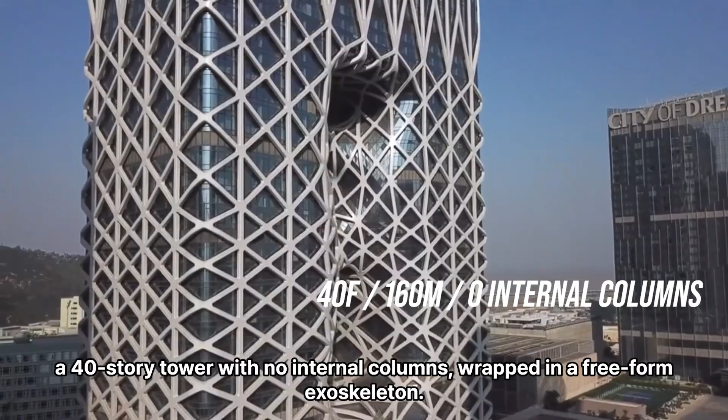We were Team 5. This is our breakdown of one of Macau's most daring buildings. For our project, we chose Morpheus Hotel, a 40-story tower with no internal columns wrapped in a freeform exoskeleton. Our story begins not with the building, but with the land beneath it. Originally, this entire area was open sea.

Through decades of land reclamation, what was once ocean is now one of Asia's most iconic skylines. But how did this strip of land come to exist in the first place?

In the 1990s, land was reclaimed to connect the islands of Taipa and Coloane. The name Cotai was inspired by these two islands. Cotai was reclaimed for additional casinos and hotels.

But on this reclaimed land rose something bold, a resort called City of Dreams. City of Dreams opened in 2009, built by Melco Resorts. It's a resort with casino, theaters, restaurants, and 4 hotels, including Morpheus. Its brand promise is Dream Beyond. Luxury, arts, and imagination in one place. But this dream needed a centerpiece.

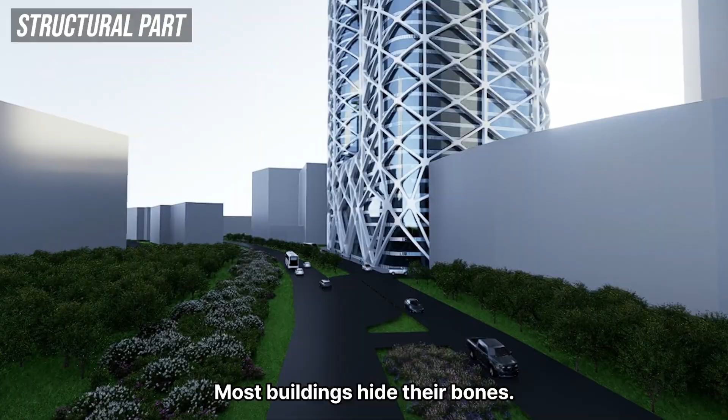We chose Morpheus because it's not just a beautiful building. It's where design asks the impossible and engineering answers. Reclaimed ground, double curved glass, no internal columns. This video unpacks how it was solved. Most buildings hide their bones. This one turned them inside out. The world's first freeform high-rise exoskeleton, in Macau.

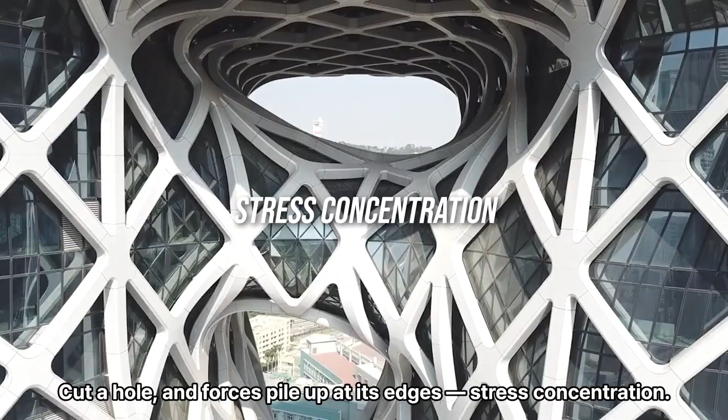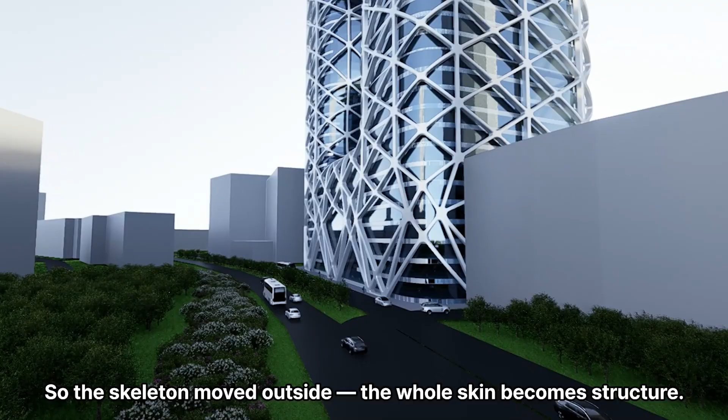But cutting holes through a tower creates serious problems. Cut a hole and forces pile up at its edges: stress concentration. And this is Macau, typhoons and earthquakes included. So, the skeleton moved outside. The whole skin becomes structure. Dense where loads are heavy, lighter as it climbs. A web of 2,500 connections.

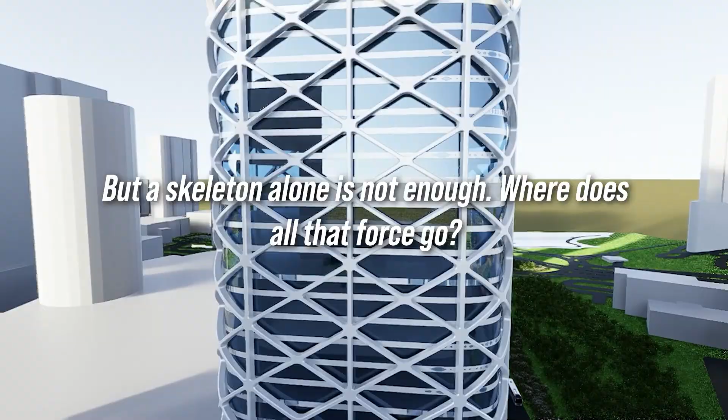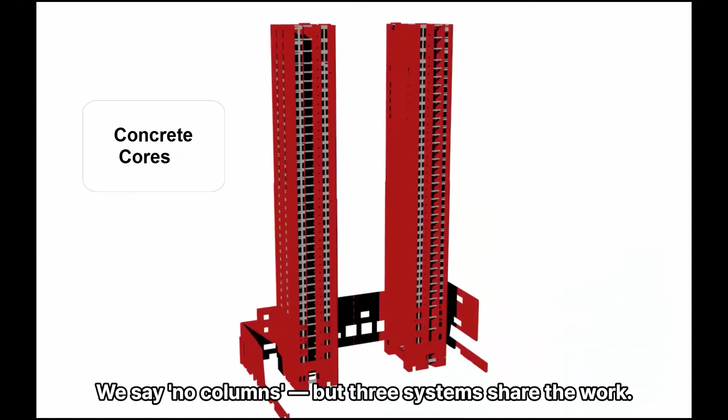But a skeleton alone is not enough. Where does all that force go? We say no columns, but 3 systems share the work. 2 concrete cores form the spine, columns beside them assist, and the exoskeleton carries the skin.

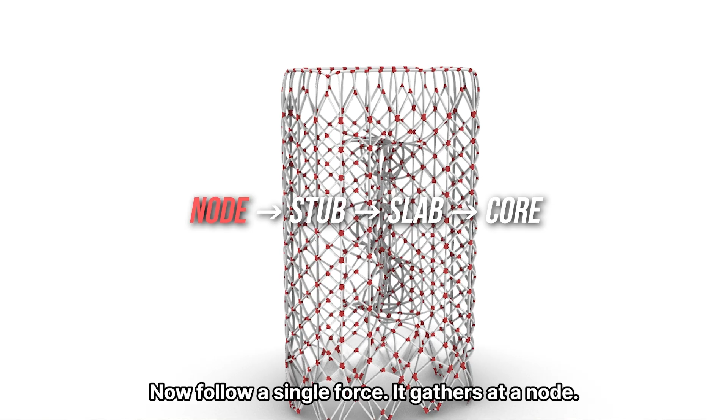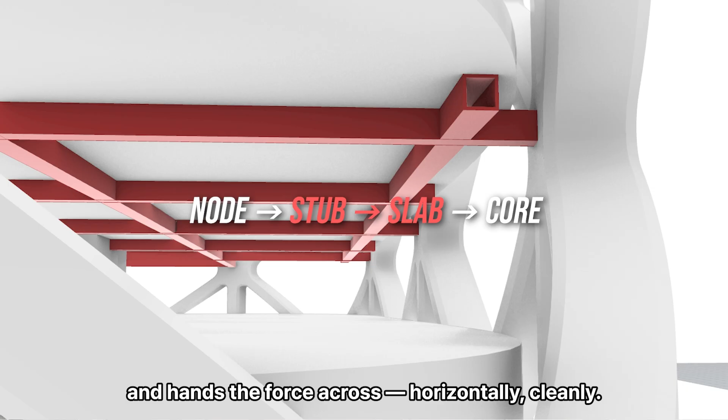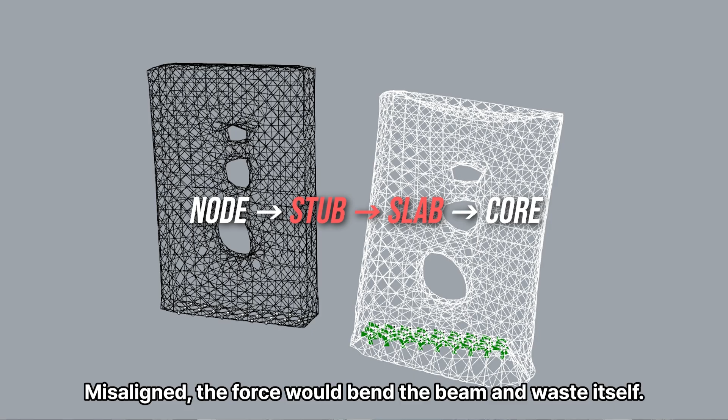Now, follow a single force; it gathers at a node. A short stub beam reaches 600 mm through the skin, and hands the force across horizontally, cleanly. The quiet genius: every node sits exactly at slab level. Misaligned, the force would bend the beam and waste itself. Aligned, it travels straight into the slab, the core, and to the ground.

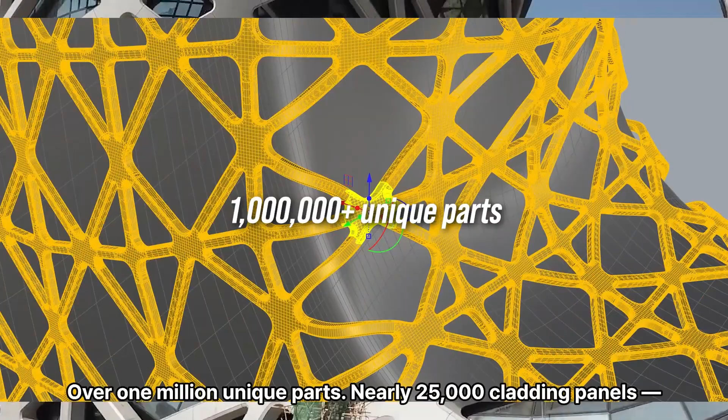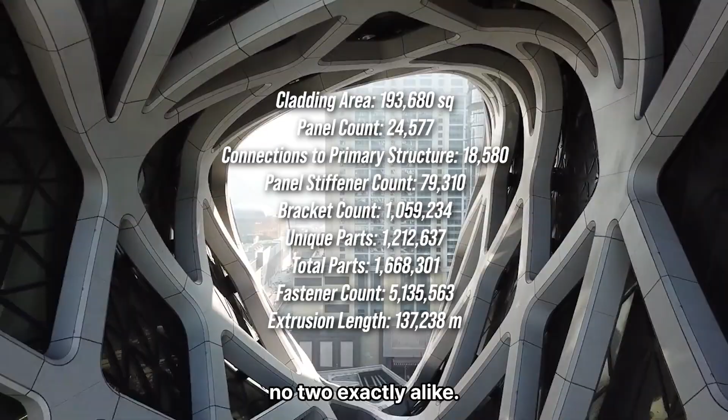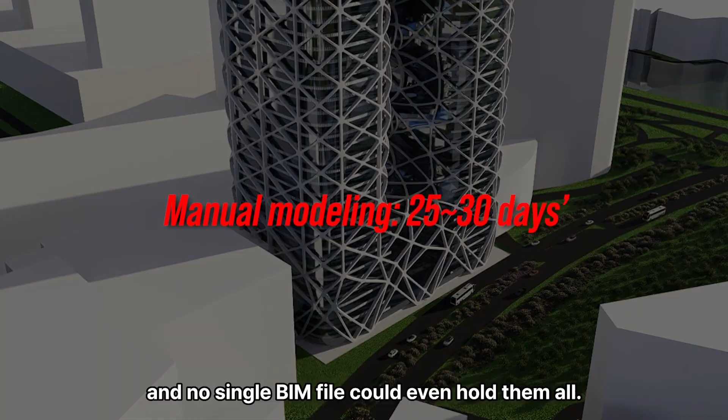But here was the real challenge. Every part was different. Over 1 million unique parts, nearly 25,000 cladding panels. No two exactly alike. Drawing them by hand would take weeks of modeling. And no single BIM file could even hold them all. So instead of drawing, they wrote rules.

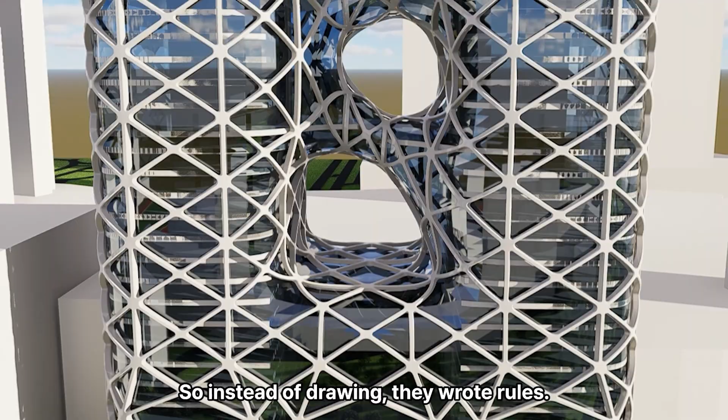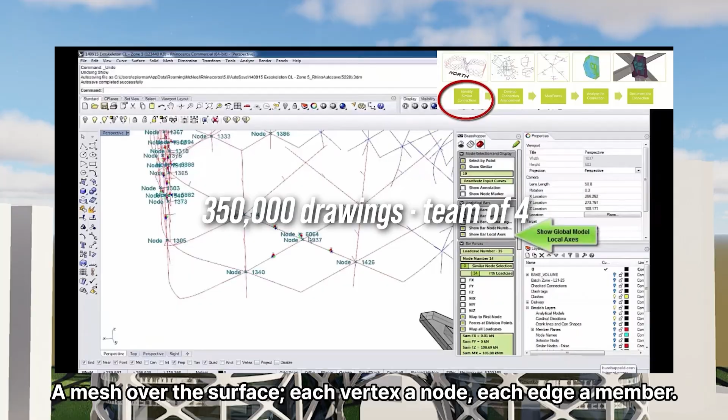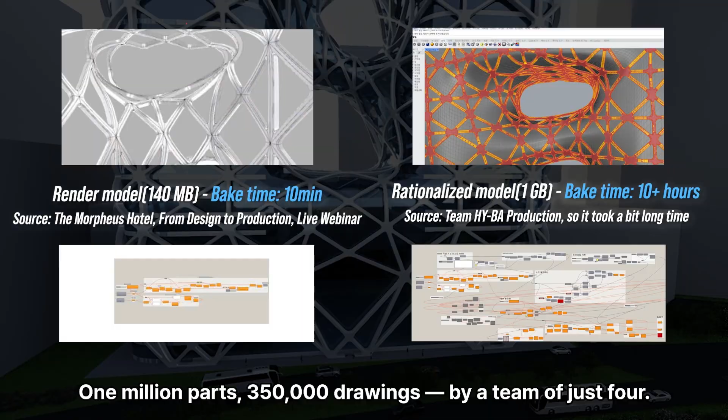In Rhino and Grasshopper, with the Elefront plugin, the entire facade was generated as data, baked every night in 10+ hours. A mesh over the surface, each vertex a node, each edge a member. Panels sorted, brackets and fasteners placed automatically. 1 million parts, 350,000 drawings by a team of just 4.

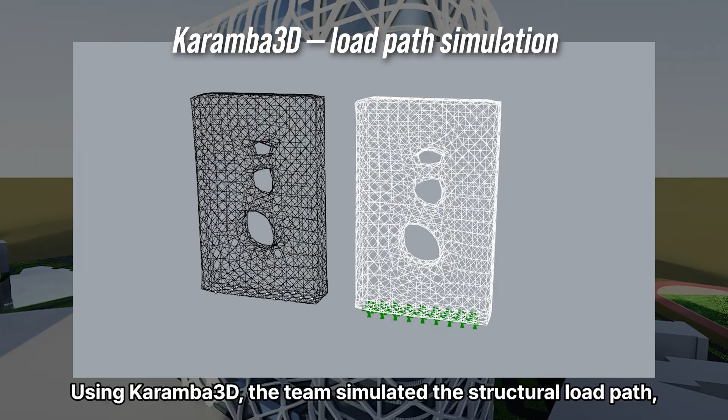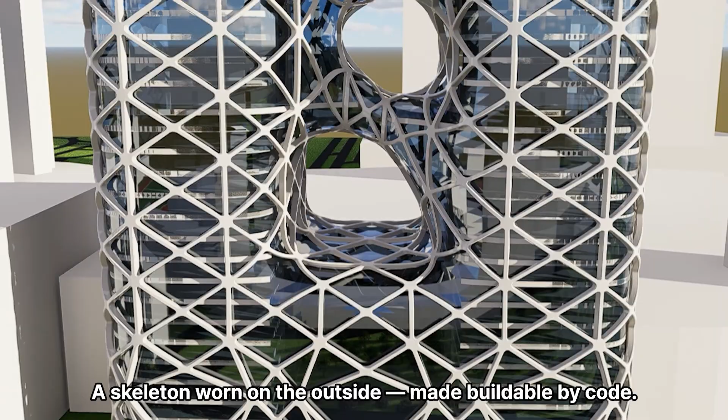But would it actually stand? We tested it in the same model. Using Karamba 3D, the team simulated the structural load path and confirmed the stress at the center stayed within safe limits. A skeleton worn on the outside, made buildable by code. Structure became its face and computation made it real.

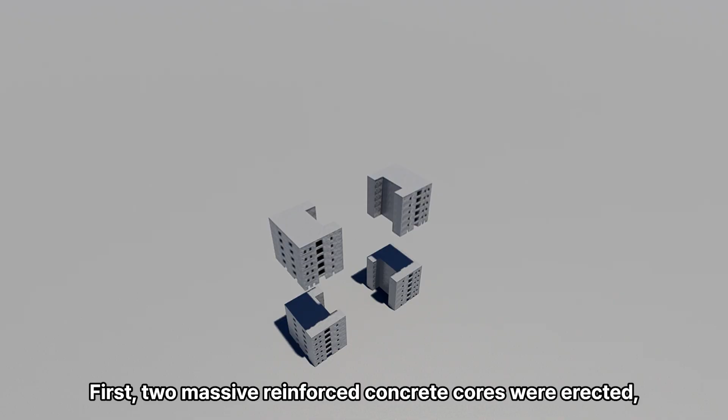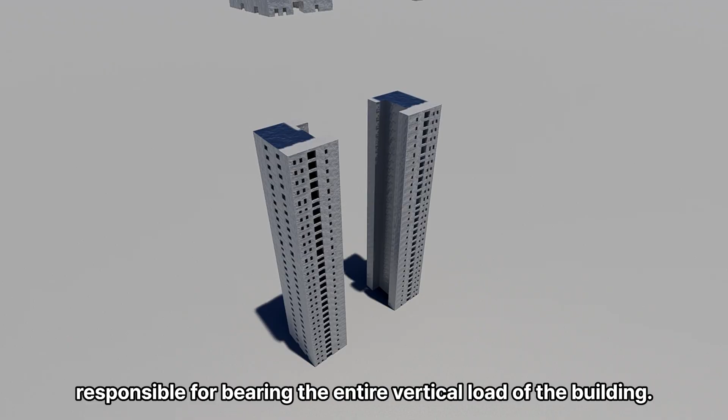Next, I will explain the construction stage. First, 2 massive reinforced concrete cores were erected, each standing 160 meters tall, responsible for bearing the entire vertical load of the building. These twin cores served as the structural backbone of Morpheus.

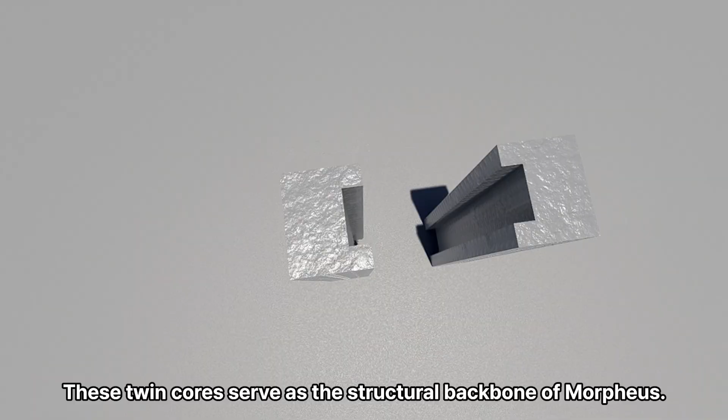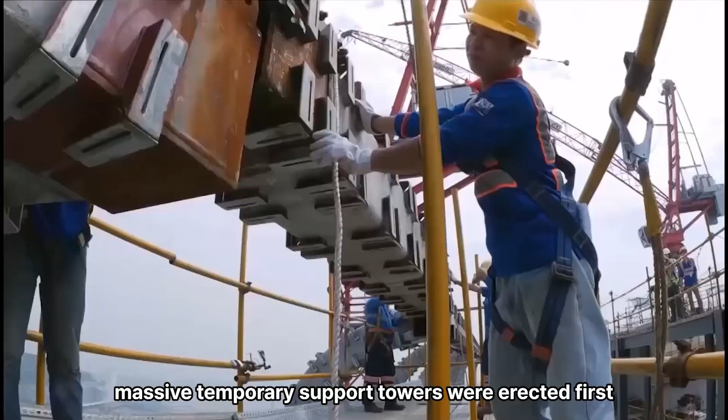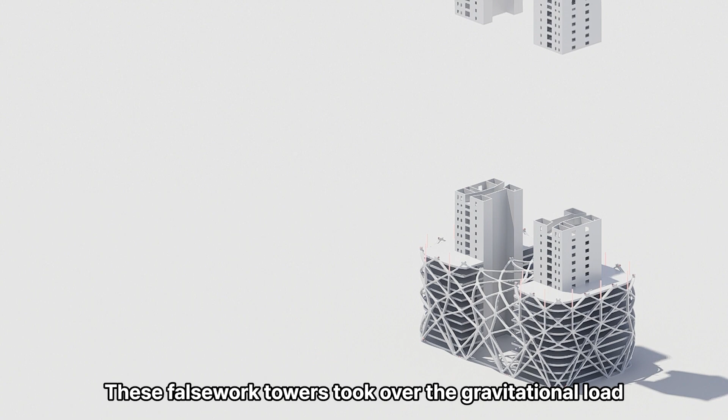As construction continued, the freeform exoskeleton had to be installed. However, it could not support itself until the full structure was complete. To keep the structure stable while steel nodes were welded on site, massive temporary support towers were erected first, to carry the 4,500 tons of steel until the exoskeleton could stand on its own. These falsework towers took over the gravitational load until the exoskeleton reached structural self-sufficiency.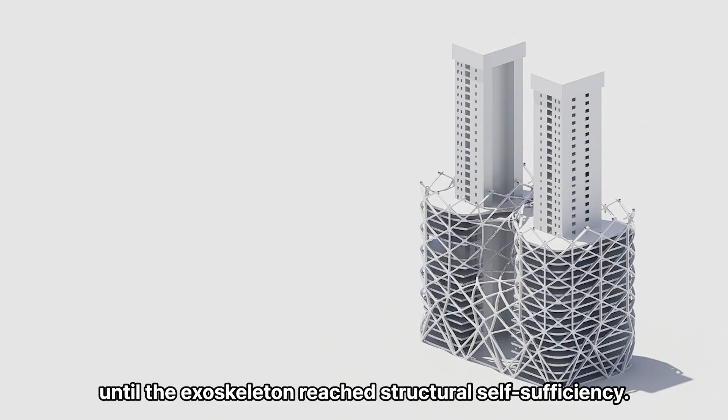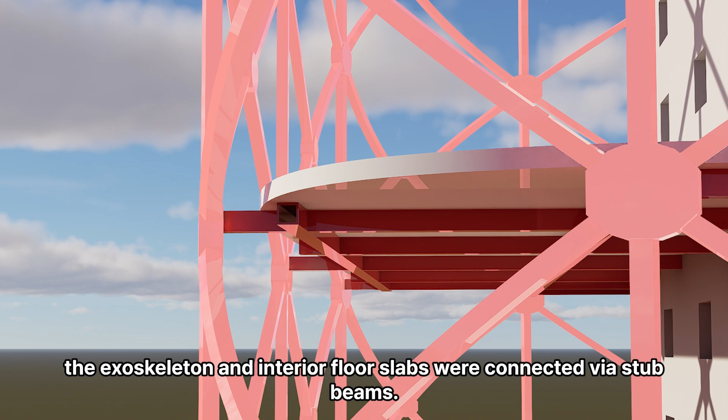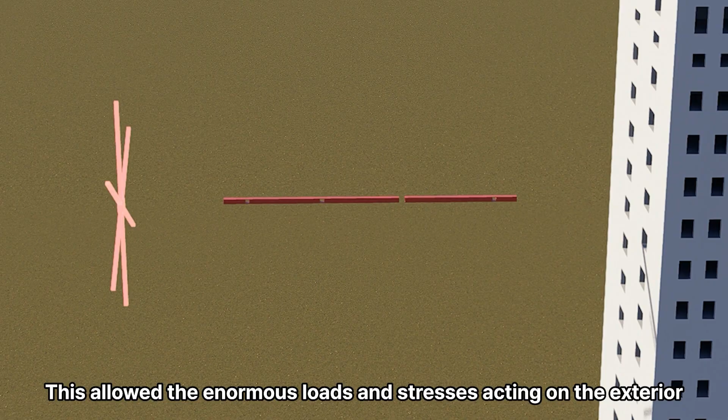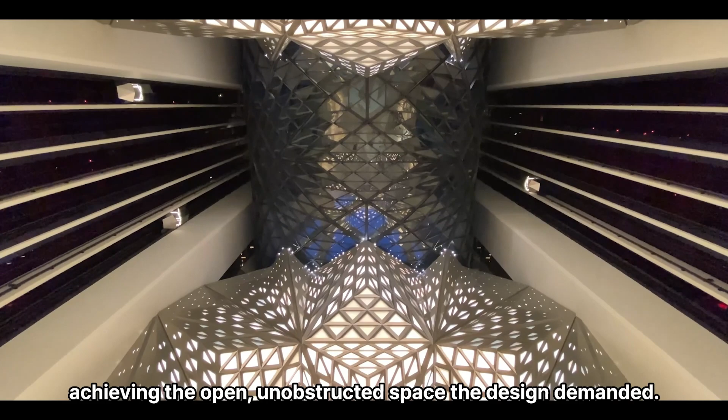The welded nodes were then sequentially integrated into the exoskeleton. Once the core reached a certain height, the exoskeleton and interior floor slabs were connected via stub beams. This allowed the enormous loads and stresses acting on the exterior to be transferred directly and efficiently into the cores without any bending. The result was a completely column-free interior, achieving the open, unobstructed space the design demanded.

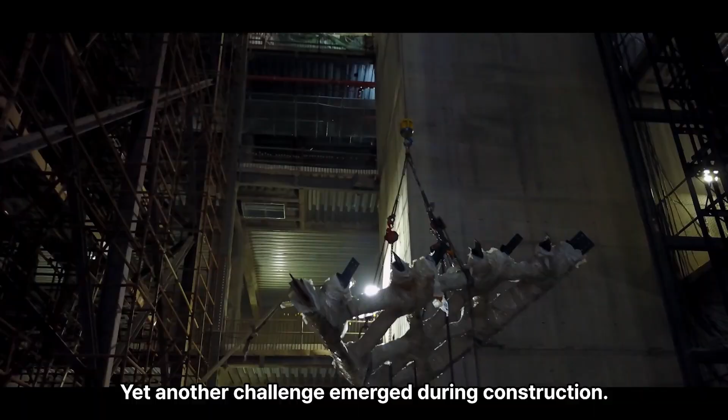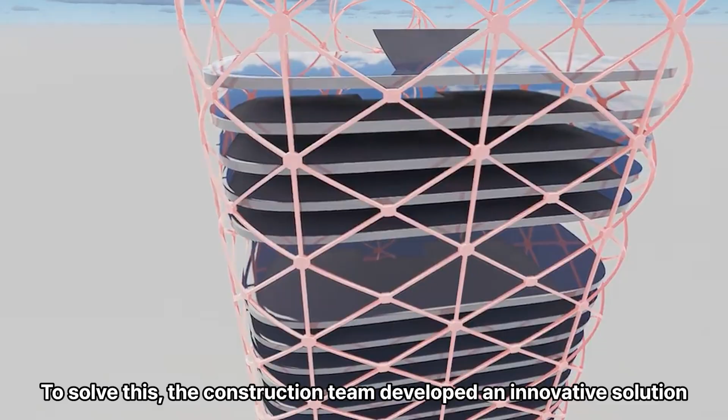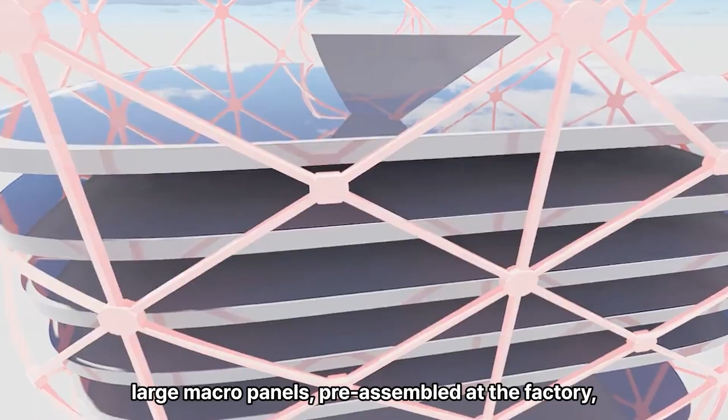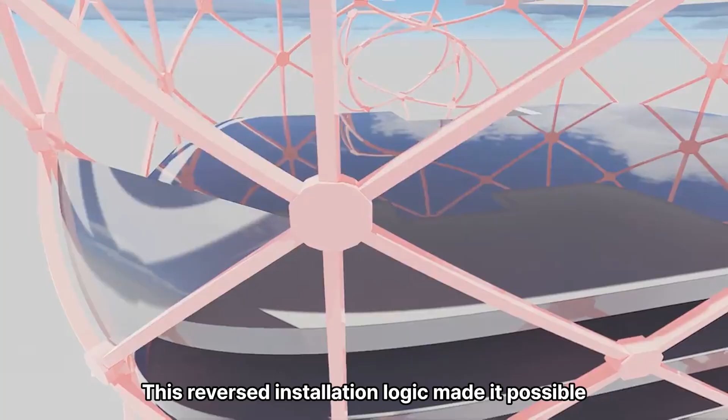Yet another challenge emerged during construction. Because of the exoskeleton wrapping the building, it was impossible to install the facade panels using cranes and gondolas from the outside as in a typical skyscraper. To solve this, the construction team developed an innovative solution. Large macro panels pre-assembled at the factory were pushed outward from inside the building and installed from the interior, not the exterior. This reversed installation logic made it possible to clad the entire facade safely and precisely.

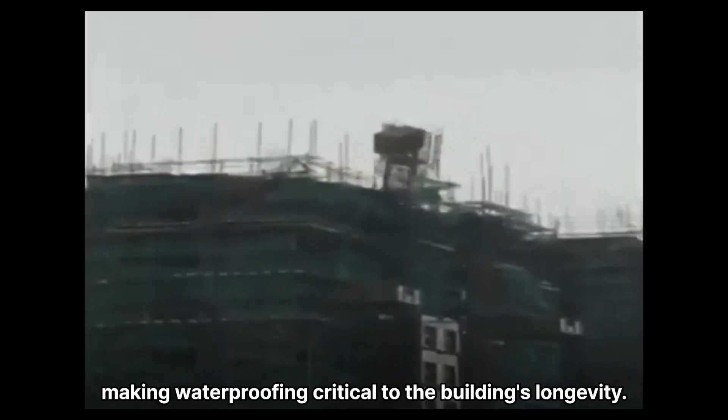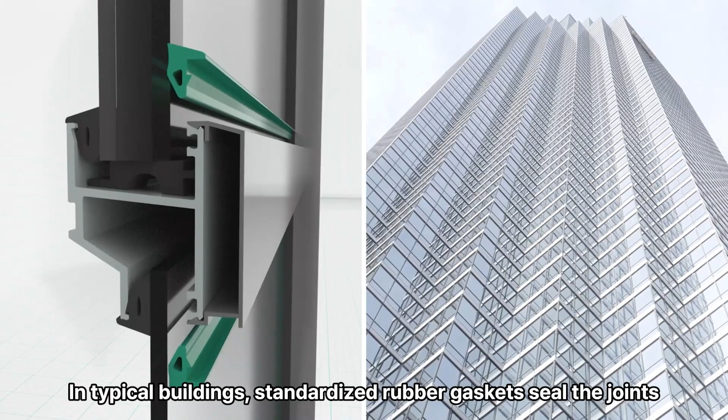Hong Kong and Macau are frequently hit by heavy rain and typhoons, making waterproofing critical to the building's longevity. In typical buildings, standardized rubber gaskets seal the joints and prevent water from seeping in. But Morpheus has 2,500 steel nodes, each one a unique shape. Standard gaskets simply cannot fit them all, leaving gaps that leak.

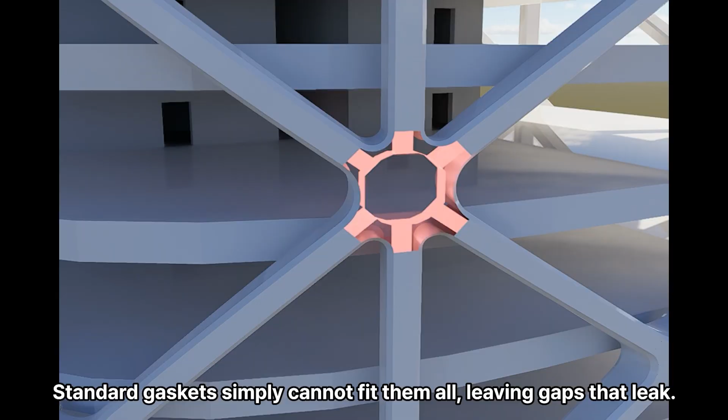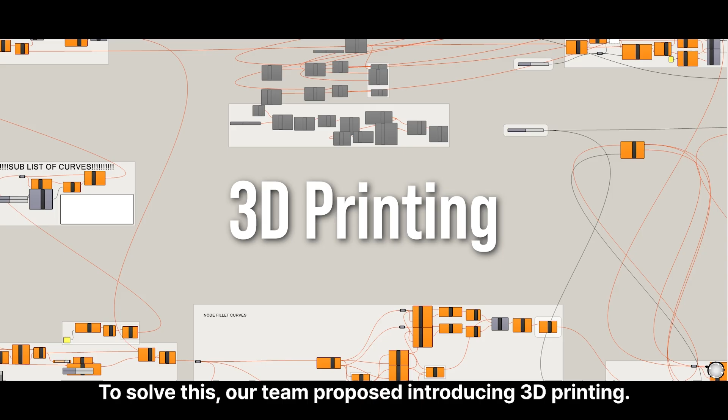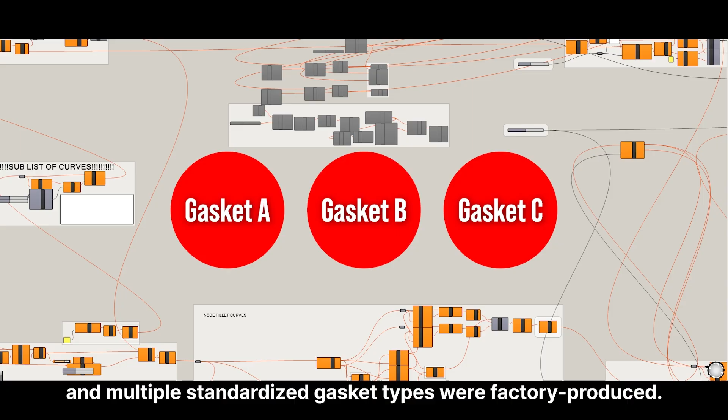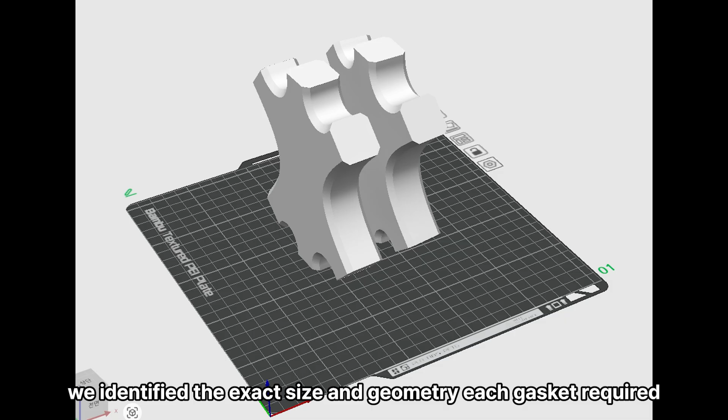To solve this, our team proposed introducing 3D printing. In the actual construction, nodes were grouped into categories, and multiple standardized gasket types were factory produced. We took this one step further. Using the 3D file data for every individual node, we identified the exact size and geometry each gasket required and proposed fabricating them on demand with 3D printing. Through this entire construction process, Morpheus has been reborn as one of Macau's most iconic landmarks.

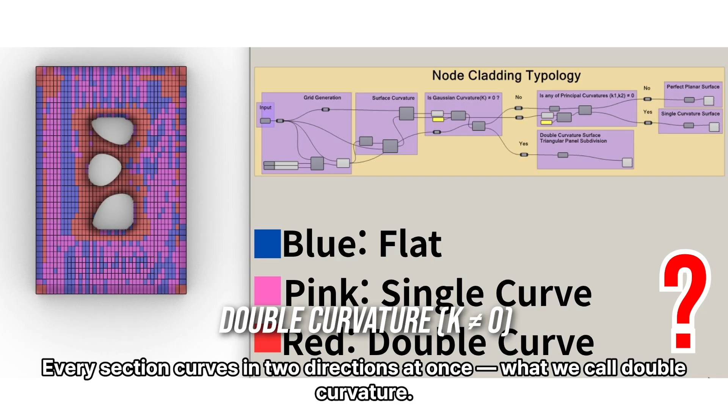Now let's turn to the glass that wraps the entire building. Each glass facade: look closely and you'll notice no two panels are alike. Every section curves in two directions at once, what we call double curvature. Can this even be built from flat glass?

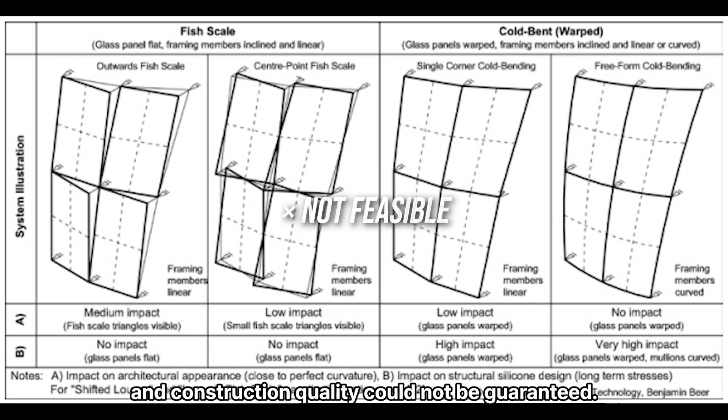Initially, cold bending was considered. It's cost-effective and efficient, but the contractor lacked the experience, and construction quality could not be guaranteed. The answer came from geometry itself. Three points always define a single plane. So any curved surface, no matter how complex, can be built from flat triangles.

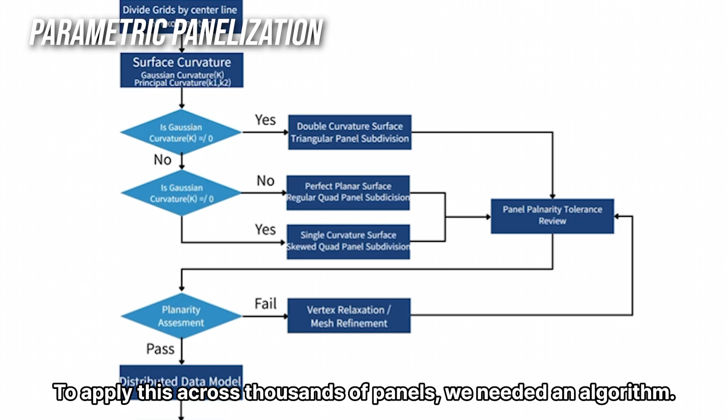And that same principle is right there on the building itself. Each glass panel of Morpheus is a flat triangle. To apply this across thousands of panels, we needed an algorithm. It reads each panel's curvature and assigns the right triangular panel type. Finally, we built this algorithm ourselves in Grasshopper software.

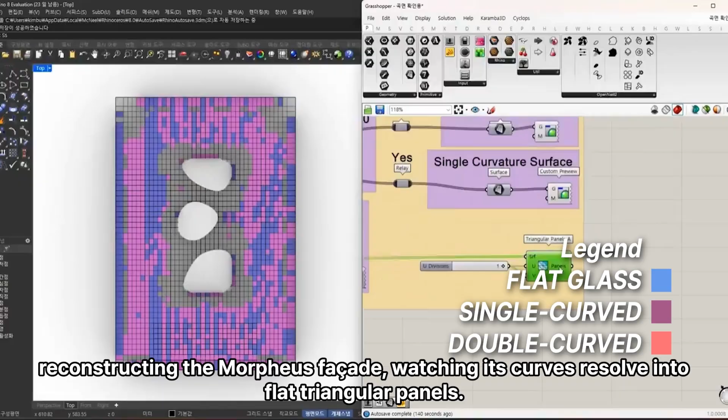It sorts every glass panel by curvature. Reconstructing the Morpheus facade, watching its curves resolve into flat triangular panels. Standing in the heart of Macau's Cotai Strip, this is not just a hotel. The Morpheus is the world's first free-form high-rise exoskeleton.

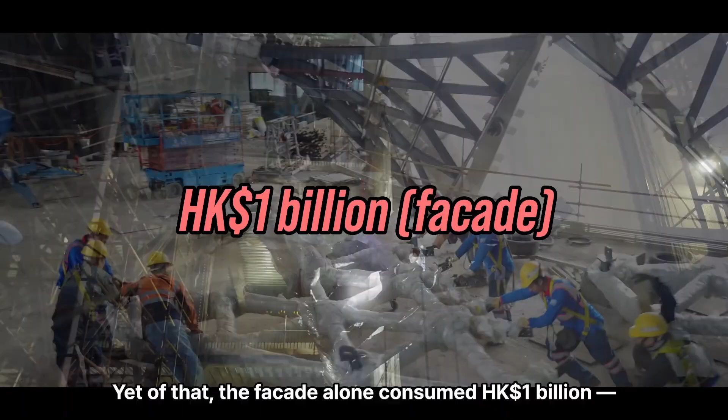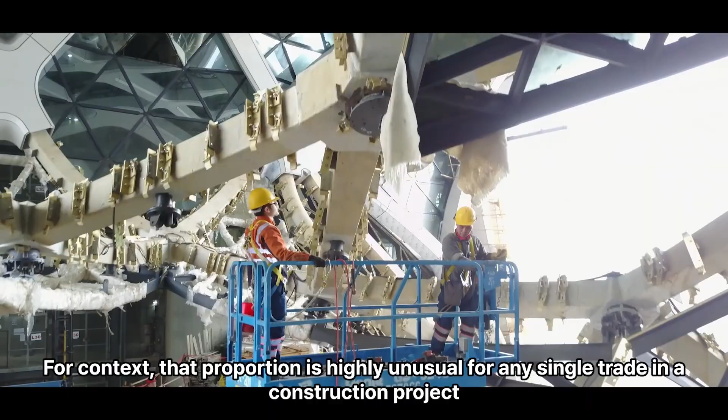Total construction cost was US $1.1 billion. Out of that, the facade alone consumed a significant share. A single package accounting for 12% of the entire project budget. For context, that proportion is highly unusual for any single trade in a construction project. From now on, we examine why this happened and what our team proposes to do about it.

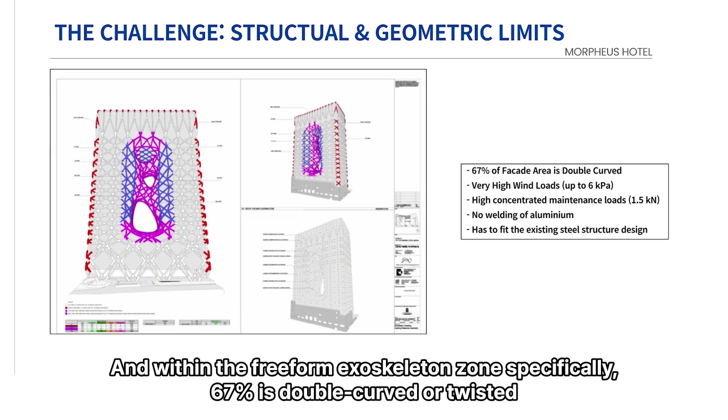The root cause of this cost explosion is curvature. The Morpheus Hotel exoskeleton aluminum cladding covers approximately 57,000 square meters. Of this, 21% of the total is double curved surface. And within the freeform exoskeleton zone specifically, 67% is double curved or twisted.

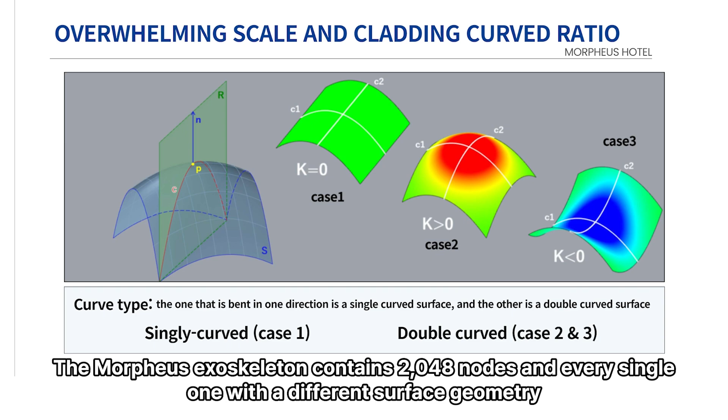There are three fundamental surface types in facade engineering: flat surfaces, single curved surfaces that bend in one direction, and double curved surfaces that curve simultaneously in two directions. Double curved panels can cost 5 times more than flat panels. The Morpheus exoskeleton contains 2,048 nodes, every single one with a different surface geometry. This is the fundamental reason facade work consumes 12% of the total project budget. So is this high cost economically justified?

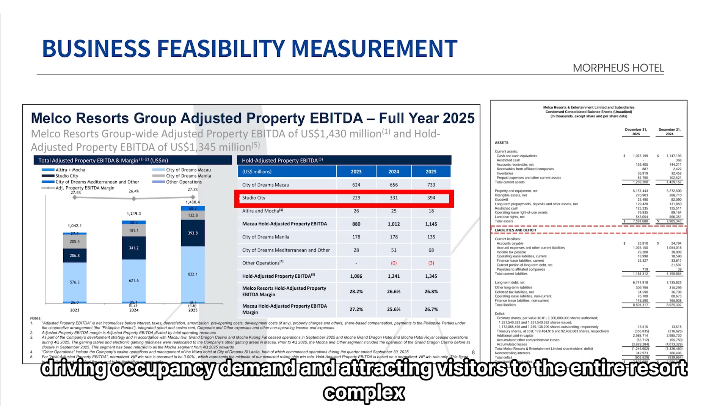To answer this, our team analyzed actual financial data from Melco results. City of Dreams Macau's EBITDA is as follows. The implication is clear. Morpheus, as an iconic architectural landmark, is generating a brand premium, driving occupancy demand and attracting visitors to the entire resort complex. Iconic design creates long-term commercial value, and that value is accelerating the recovery of the initial investment.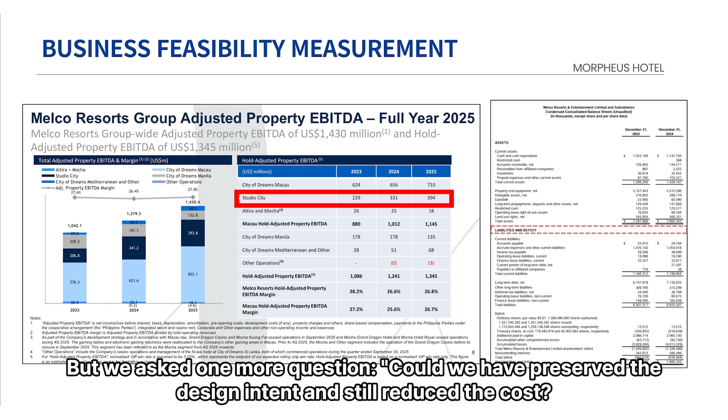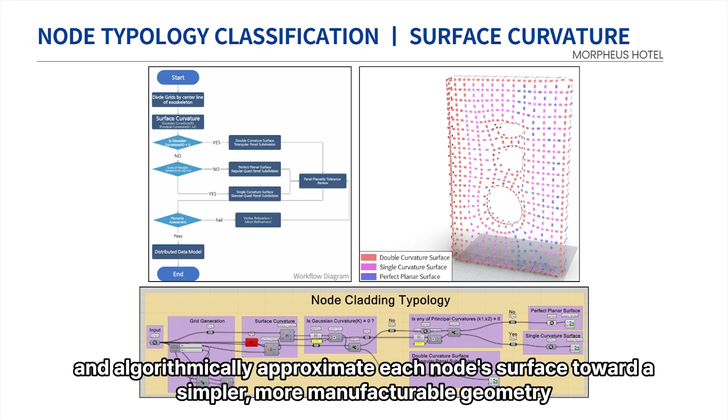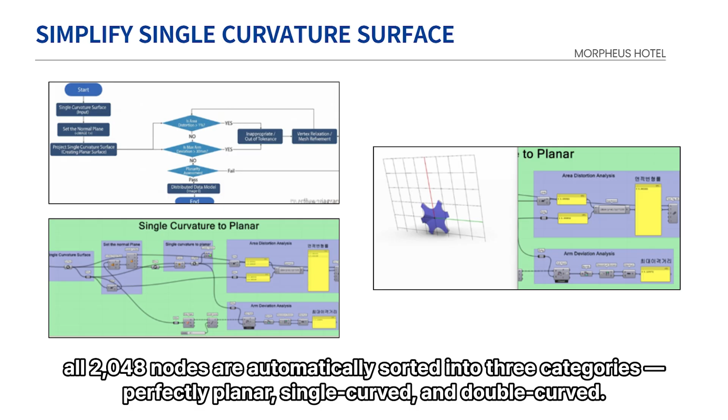But we asked one more question: could we have preserved the design intent and still reduced the cost? Our team's approach was to apply a 30mm cold bending offset tolerance and algorithmically approximate each node's surface to simpler, more manufacturable geometry. Step 1: curvature classification using Gaussian curvature and principal curvature analysis. All 2,048 nodes are automatically sorted into 3 categories: perfectly planar, single curved, and double curved.

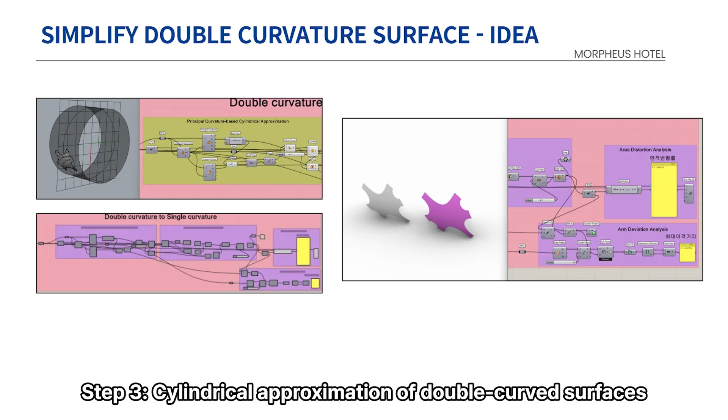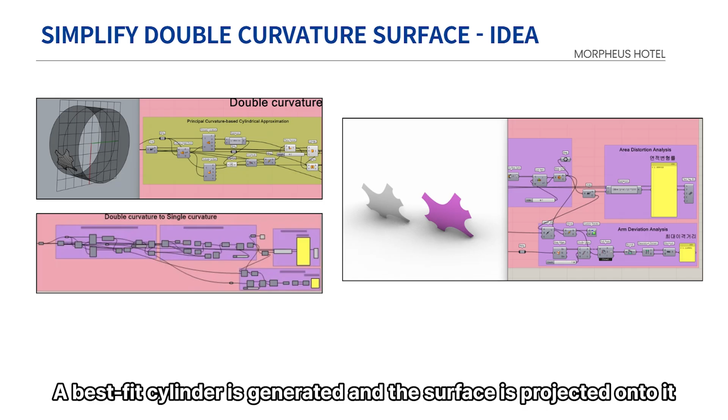Step 2: planarization of single curved surfaces. For single curved nodes, a normal plane is generated at the geometric center of each surface. The curved geometry is then projected onto this plane, converting it into a perfectly flat, fabrication-ready panel. Step 3: cylindrical approximation of double curved surfaces. For double curved nodes, principal curvature analysis identifies the dominant curvature direction. A best fit cylinder is generated and the surface is projected onto it, transforming the double curved geometry into a cold bendable single curved form.

Here are the results. All 997 double curved nodes are reduced to 0. Planar nodes increased from 226 to 948. Single curved nodes rise from 825 to 1,100. To quantify the cost impact, we applied conservative fabrication cost multipliers: flat at 1, single curved at 2.5, and double curved at 5. In practice, these ratios can be significantly higher. These figures represent a conservative lower bound based on academic literature.

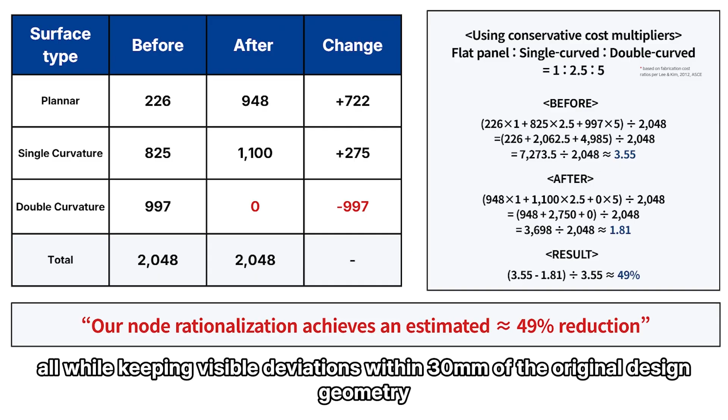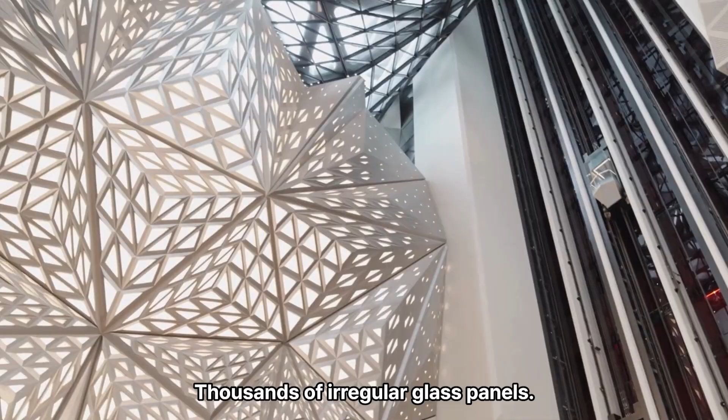Applying these multipliers, the weighted average fabrication cost per node is reduced by approximately 49%, all while keeping visible deviations within 30mm of the original design geometry. Morpheus Hotel is not merely a beautiful building. It is the convergence of digital design and construction technology making the impossible real. Thousands of irregular glass panels, 2,500 unique exoskeleton joints. No two pieces alike, yet one parametric algorithm wove this complexity into a single order.

What this project taught us is clear. In architecture, impossible is no longer where the story ends. Define the problem, decompose it with algorithms, solve it with the right tools. This process itself has become the new language of modern architecture. The curves Zaha Hadid left behind were not just forms. They were a challenge demanding answers to countless technical questions. And the journey of finding those answers, that is the greatest insight we gained from Morpheus.

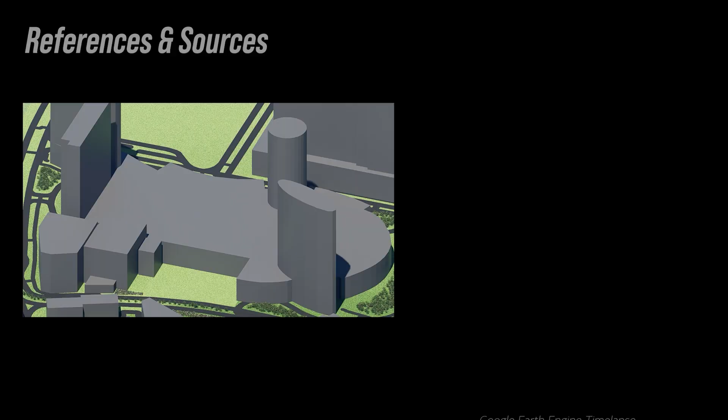We will conclude our presentation by showing our references and sources along with a video of a construction process we created. Thank you.